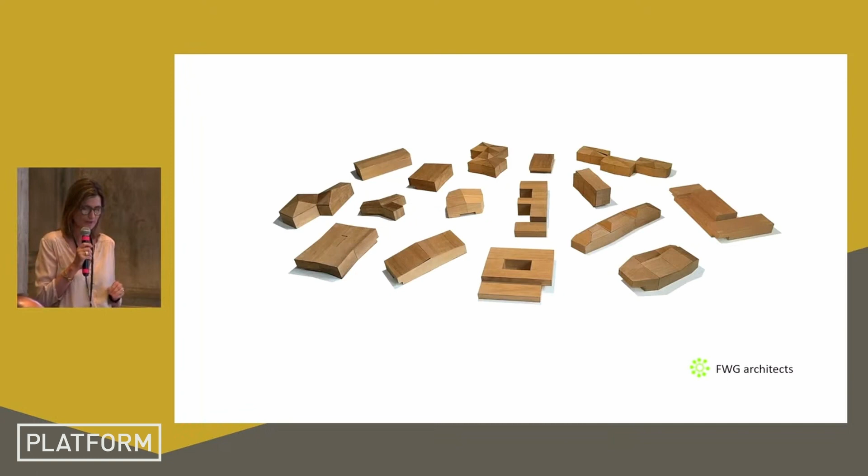So as it's a very short format and already 1 minute has passed, instead of talking about the different architectures we've done, we decided to talk about what we seek or what we pursue in our architecture. I'm trying to only use 7 concepts in 7 minutes.

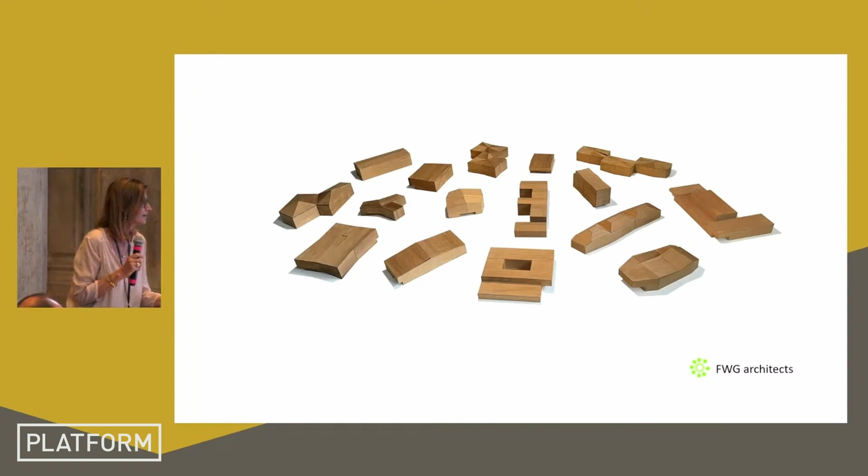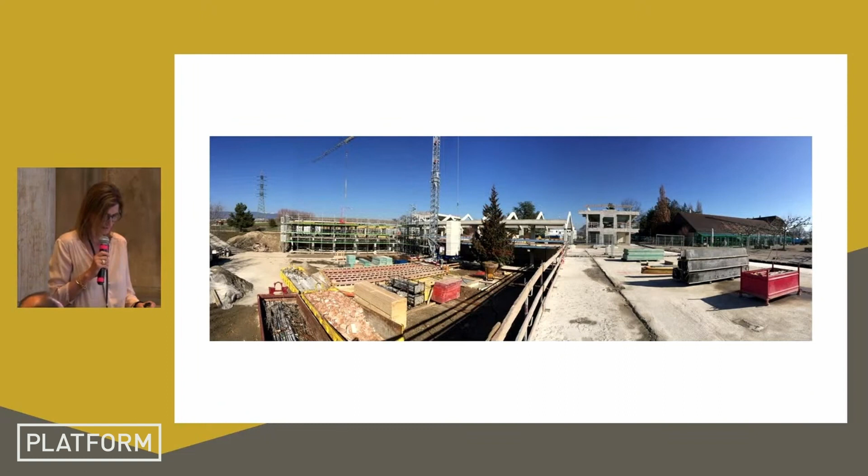So here you have an image of all the concrete that we could preserve. And here you can see the changing. It was mostly a change of energetics and a new facade, but that allowed us to keep tons of concrete that otherwise would have been demolished.

So therefore, making with implies collaborating with the natural environment, and it's basing architecture on the principle of not harming, but rather healing.

The second concept or theme, geometry and placemaking. For us, there is no form without geometry, and we understand geometry as the foundation for creating spaces and fostering encounters. Here you can see a diagram, a very well-known one, by Aldo Van Eyck, the architect, that illustrates very easily how a geometric circle can be both an opening towards the outside and a force that brings people together.

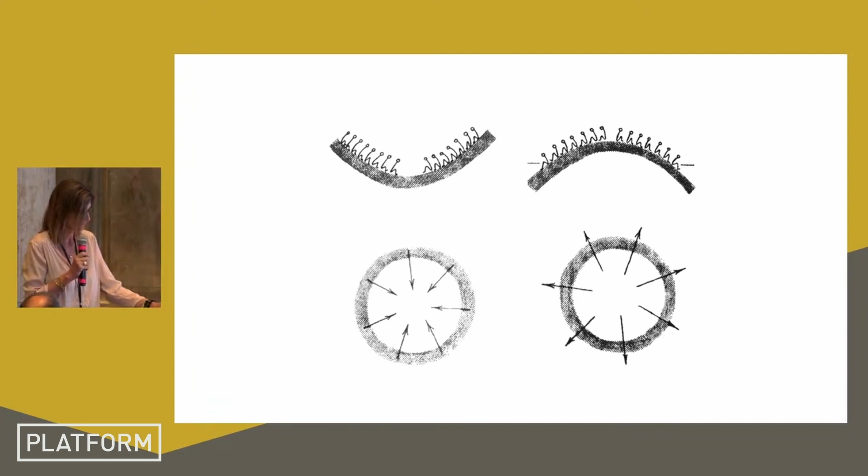The following project took place in Lyon. It was a participation in the Biennale d'Art, and we did it with our students with a design proposal that really was trying to integrate the built environment, especially taking into account the geometry of the Place des Terreaux, which is a principal place at Lyon.

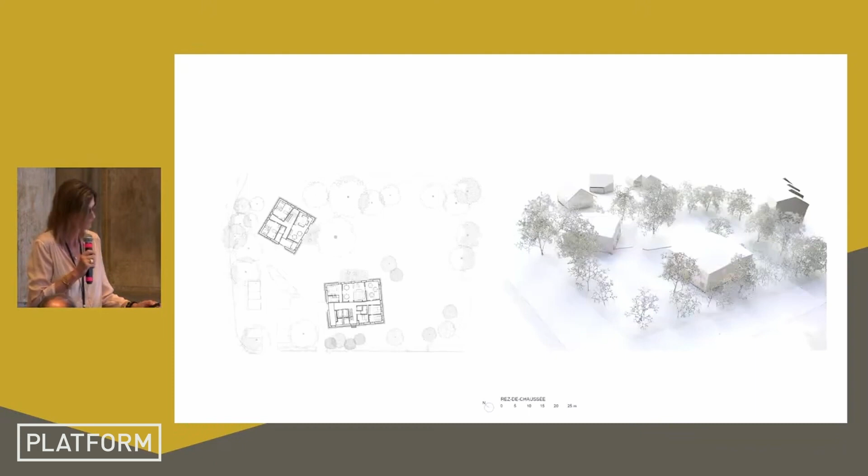The following image is from a project in Switzerland, in Aubonne. We had to insert 2 buildings in this vegetal environment, and we were aiming to minimize the cutting down of the existing trees. As you can see, the buildings are inserted into the environment, aiming to have the least impact.

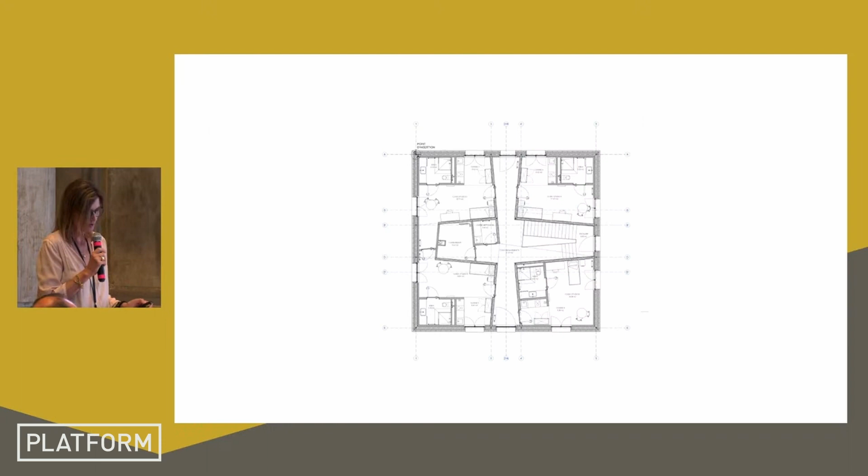And also, how do we use geometry? In the next image, you see how we use the geometry within a stable form, a square, and the idea is moving the interiors to generate small corridors, creating small spaces for gatherings.

In the following image, this is the other building which is in front of the workshops - one is the workshops for elderly people, and this is the housing for them.

In the following image, we can observe how we use geometry as an idea that it's like a protective shelter that protects, envelopes the building, even taking into account the roof. So one building is an extroverted building with a lot of light, where there is the activity of the workshops. The other one is a much more introverted building with only one material.

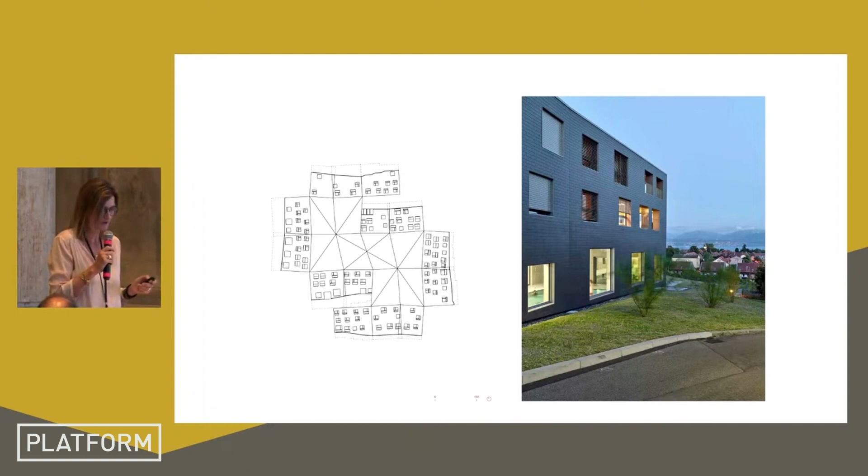In this following image, you can see how we use the geometry. There are very subtle inflections in the wall, providing uniqueness to each room. Or, for example, in the pool area, the windows frame the landscape, while on the roof, the intentional geometry was designed to resonate with the mountains.